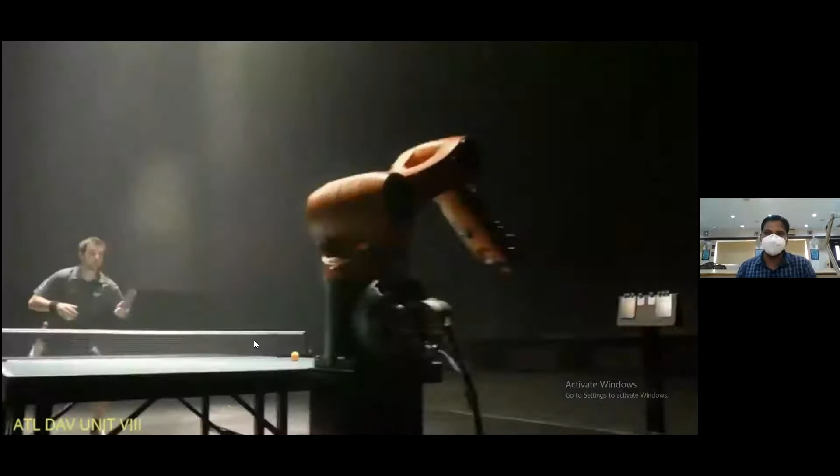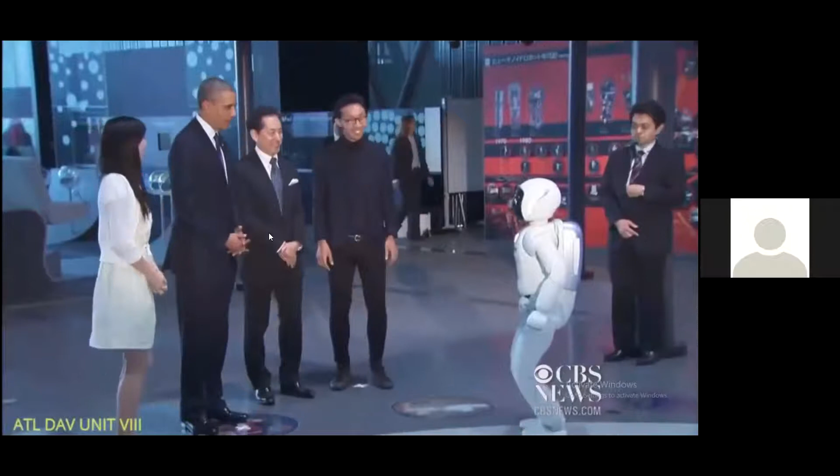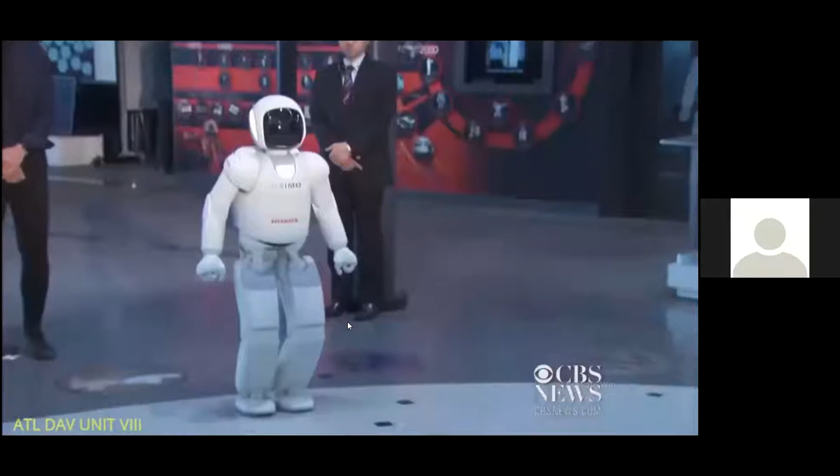Welcome to Miraikan, Mr. President. I'm ASIMO, a humanoid robot. Here I go. I can hear. It's going to be pretty hard, huh? If it hits me in the nose, it'll be terrible. I can keep you watching. Okay, come on, I'm ready. Right here? Here I go. Hey!

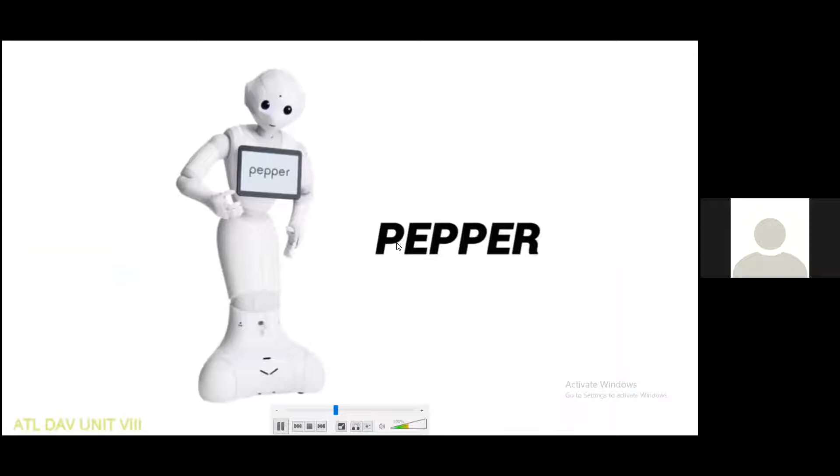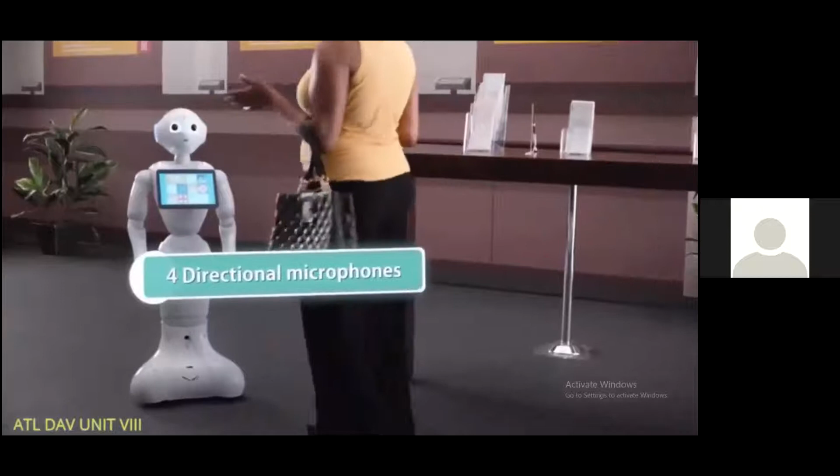This is Pepper, manufactured by SoftBank Robotics. Pepper is the world's first social humanoid robot that is able to recognize faces and basic human emotions. Pepper has been adopted by over 2,000 companies around the world.

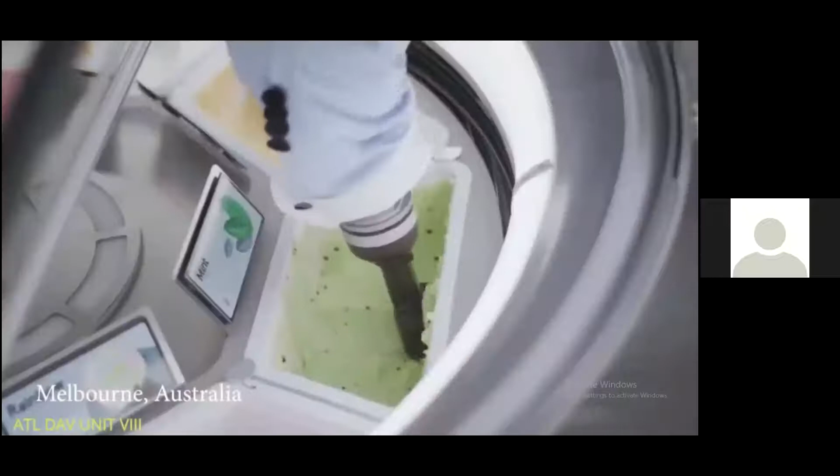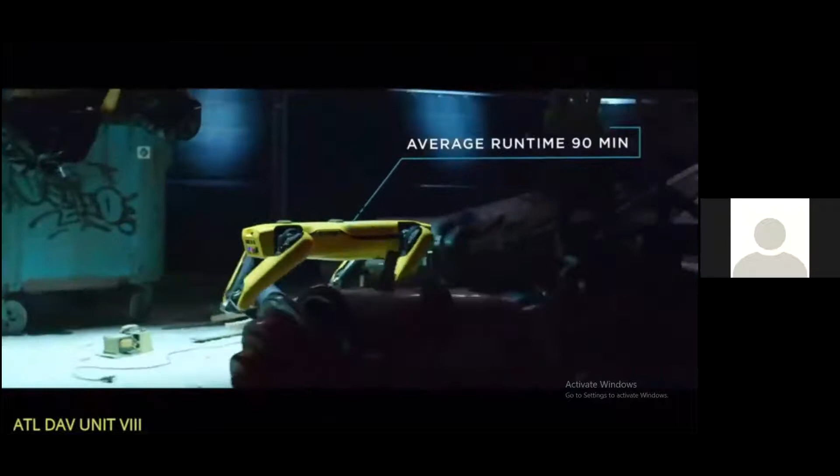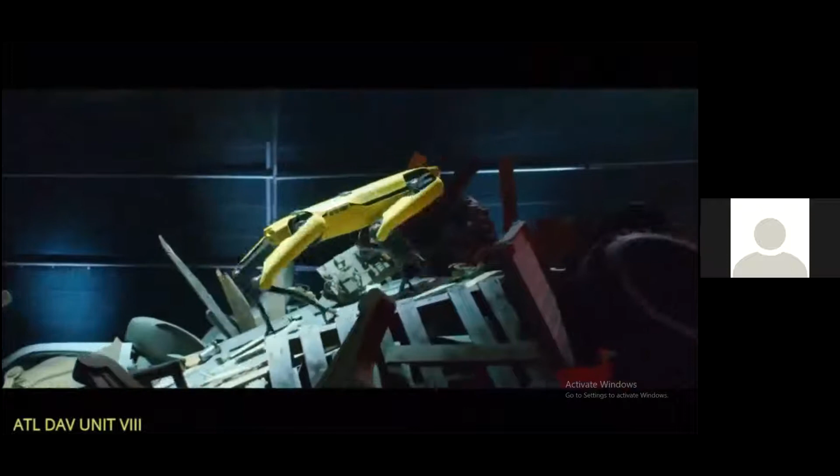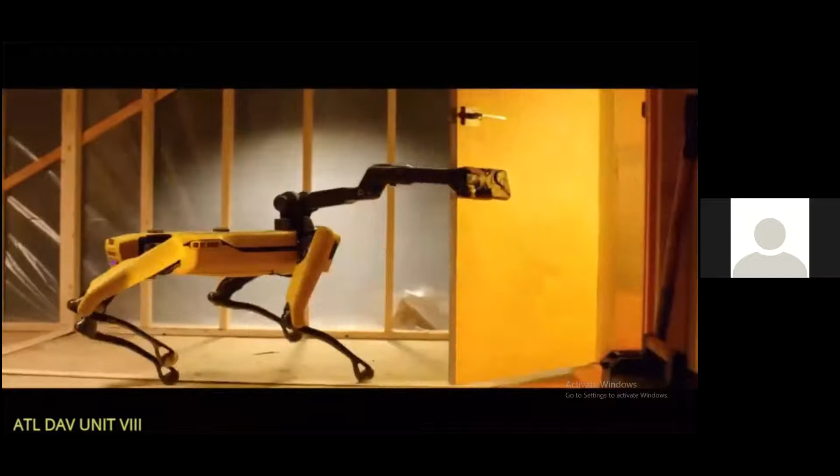Introducing Spot, a robot dog designed for industrial uses, such as carrying goods through a warehouse and inspecting a remote site with an unfavorable environment for human operators. It can run at 5.2 feet per second, has 360-degree cameras, and can operate in temperatures ranging from -4 to 113 degrees Fahrenheit. With its API and flexible payload interface, the robot can be easily customized for desired tasks.

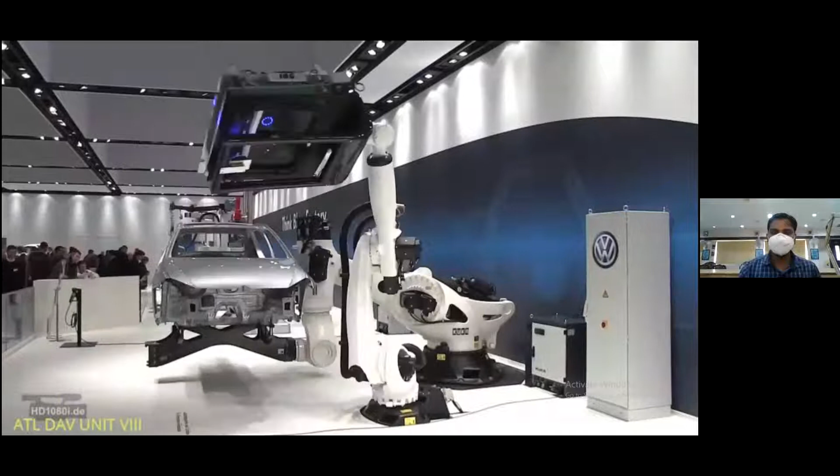Dear students, I hope you all have enjoyed the video. But here a question arises: in this video, what is challenging the human beings? Who is playing with the human beings? And what is making the work easier for the human beings? Yes, they all are robots.

So welcome again to all of you to this robotic workshop. Let's go forward. In this session, what we are going to discuss: first, what is a robot, then the basic architecture of a robot, then the structure of a robot, and different equipment used in the robot we are going to make today. Then we'll have a hands-on activity on making an obstacle avoiding robot.

So, what is a robot? You can share your answer in the chat box. What is a robot? I'm waiting for your responses. Okay, let's discuss.

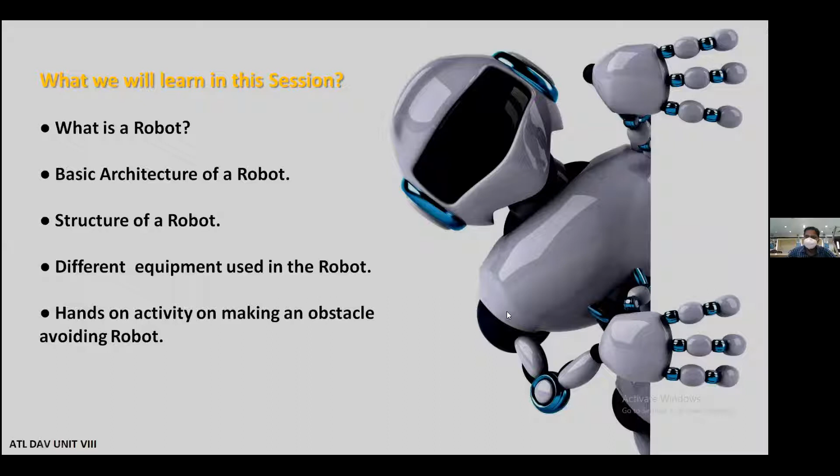A robot is any machine that is automatically operated and replaces human effort. That machine operates automatically, meaning we give a situation to the machine and the machine responds to it the way we have programmed or instructed it. Any machine, if it follows our predefined instructions, we can call that machine a robot.

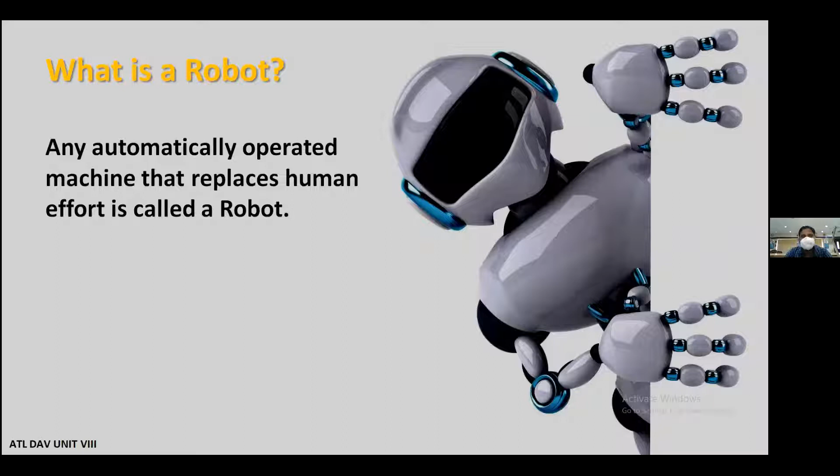Let's discuss all three blocks in detail. First, let's discuss the sensors. What is a sensor? Any answers from your side, dear students? What do you think a sensor is? Okay, recognize a particular motion. Any other answers? Okay, let's discuss. Take output. A device that senses any activity.

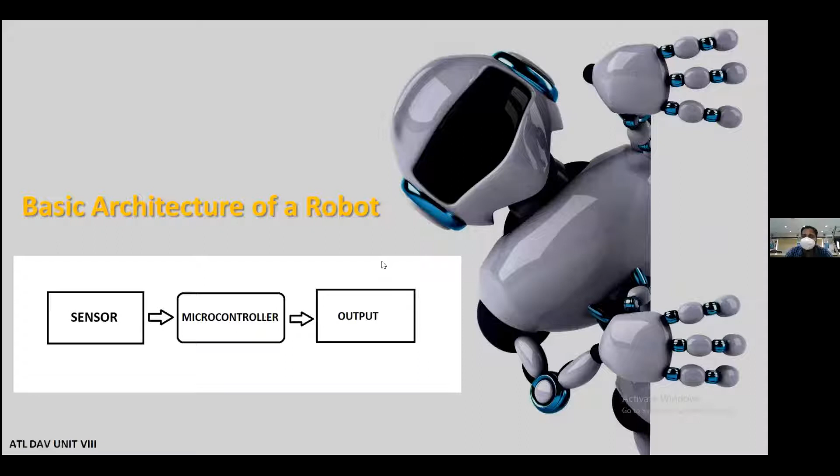No sensor directly transforms the same thing to our brain or the processing unit. It converts to something. Suppose I am touching a hot surface, that heat or temperature converts to some biological signal. That signal is given to our brain.

That is the microcontroller of our human body system, or the brain of the system. Similarly, the sensors which we are going to use in different kinds of automated things, they also do the same thing. They convert physical quantities like heat, vision, or any other physical quantity into an electrical signal, which we can process through a microcontroller to get a desired output, or to function some output devices so that our objective will be fulfilled.

So in one line, if I tell you what is a sensor: a sensor is a device which converts the physical quantities of our surrounding world into an electrical signal.

Suppose I ask you one question. I have made one system that needs to detect a human face. So which device do I need to use? It is very familiar to you all. Yes, someone said OpenCV. OpenCV is the module or the library, so the device is the camera.

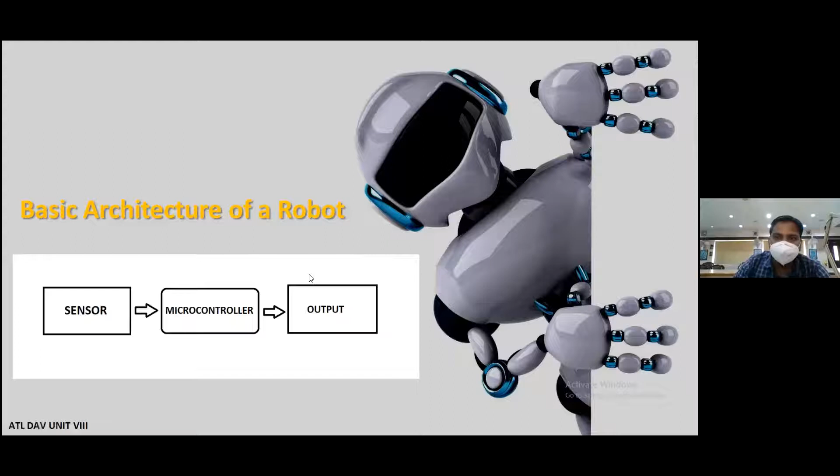Let's go to the next slide. Structure of a robot. So one question arises here: is it necessary that the structure of all robots should be the same?

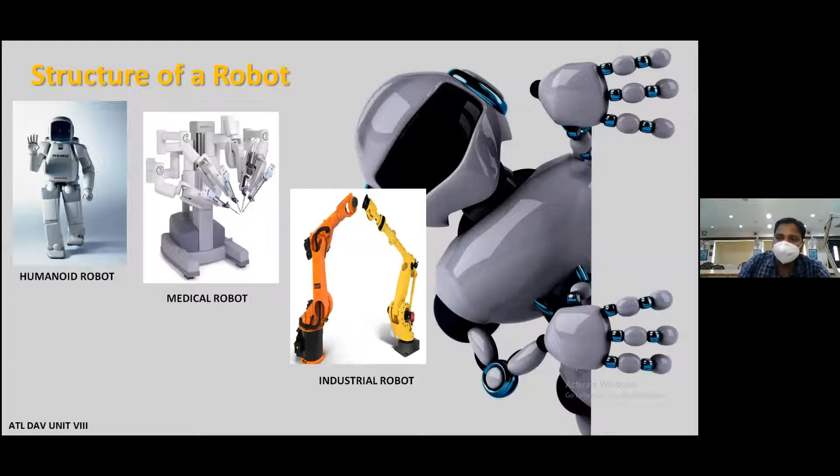Okay. Then today we are going to design an obstacle avoid robot. The function of the robot is whenever an obstacle comes in front of it, it will just move, it will turn itself to avoid that obstacle.

To do that, what we have used here: one plyboard, you can take cardboard as well, or any hardboard plastic sheet of 20 cm into 10 cm, and you can choose your size also.

So to detect the obstacle in front of the robot, we need a sensor. Otherwise that system cannot detect anything in front of it. Like we have the sensor, our eye, we can see so that we can avoid obstacles, but how will the machine do it? It needs a sensor.

So here we are using an ultrasonic sensor. As a microcontroller, we have taken an Arduino Uno. We'll discuss it in detail.

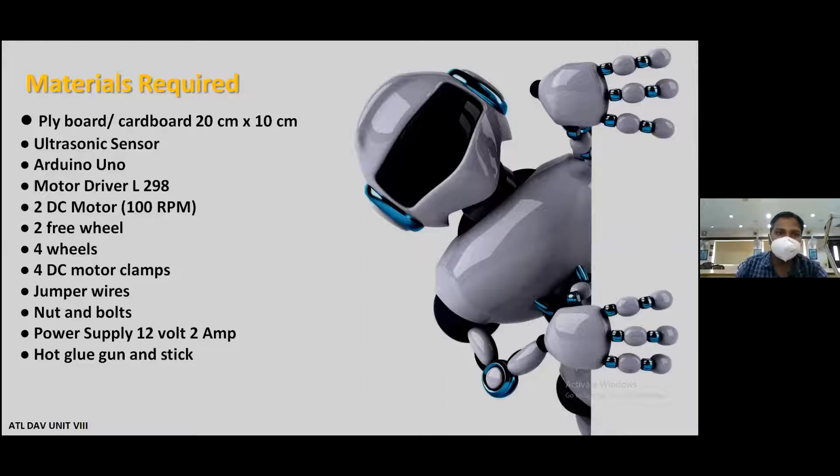Power supply to give power to the robot. We have taken here 12 volt 2 ampere, and hot glue gun and stick for fixing the components or the equipment. Okay, so let's discuss the equipment we are using.

Next, the remaining 2 pins - one is trigger pin, in short written as trig, and another one is echo. So let's discuss how it works. Ultrasonic sensor works on the principle of sound. We will send a high frequency sound from the transmitter, and that sound strikes the object and returns back. Which animal uses this principle to detect obstacles? Can you answer?

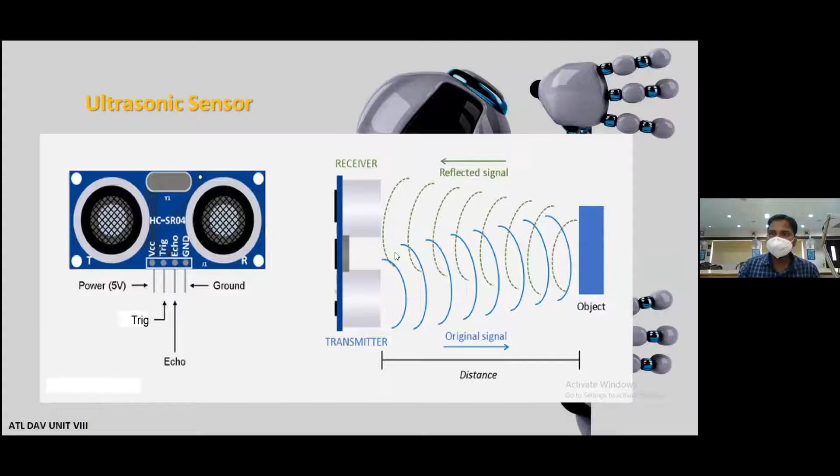Now let's discuss Arduino Uno. Here we are using the Arduino Uno as the microcontroller, or brain, of the system. Let's discuss the pins first.

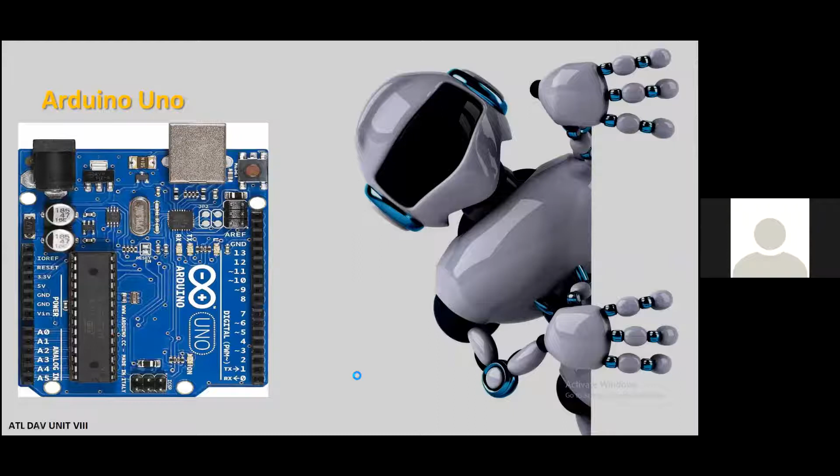Good morning, Tanmay sir. Good morning, ma'am. Good morning, children. Rishabh Mishra, what are you asking and to whom are you asking? Rishabh Mishra, class 11. What are you asking and to whom are you asking? If you don't wish to continue in this class, leave it. What wrong lesson are you writing? If your mind is elsewhere and you're not interested in this class, please don't disturb, and keep writing wherever you're writing to. Rishabh, could you hear me? Yes, ma'am. What, to whom are you writing now? No ma'am, actually in this robotic class meeting, another boy was asking me something, and I was replying. Please, if people are in class 11, you should see how LKG and UKG children are writing and how involved they are. They interact with teachers respectfully during the class they are attending. And you people in senior classes are just diverted and distracted even during classes. No ma'am, this is happening exactly in your online class as well, another person was asking me something and I was replying to him. Listen everyone, concentrate on the specific class you are attending. Yes ma'am, sorry. Sir, please continue.

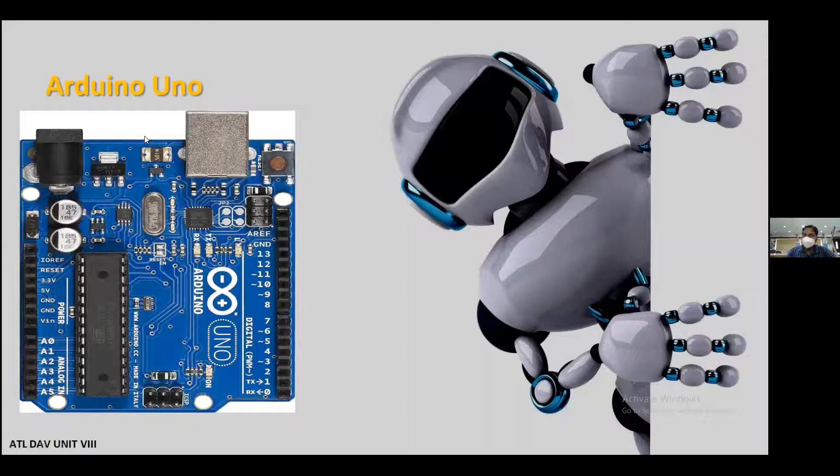Tanmay sir, somebody is writing - sir, please repeat what is digital. Yes ma'am, what is digital? Listen, suppose one more example I will give.

Again I am repeating, if a situation is varying with time, it is analog. If a situation has a constant value, that is digital.

Suppose I ask you, is the light switched on or off? You will tell me off or on, that means it stands as one of these two things. Either it is on or either it is off, not in between. This type of thing we can call digital.

In digital, we always say that computer works on 0 or 1. Going more technical, suppose one sensor gives an output ranging from 0 volt to 5 volt. Another sensor also gives output from 0 to 5 volt. But if the situation is correct, it will give you 5 volt, or if the situation is not satisfying, it will give you 0 volt. But in the same situation, another analog sensor may give you a value of 0.2, 1.2, 3.5, like this. So digital sensors always give us fixed values, two fixed values.

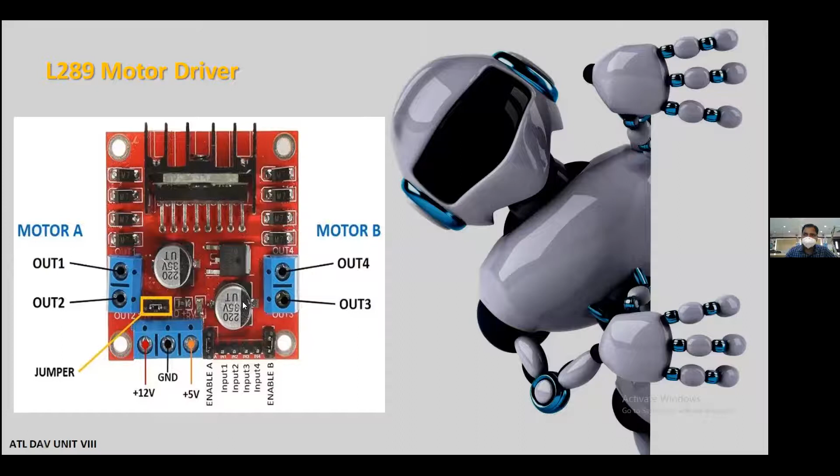So here I have taken four variables: RMF, right motor front, right motor back, left motor forward, left motor backward. For that I have taken pins 3, 4, 5, 6, the digital pins in the Arduino, which will be connected with the motor driver.

Motor driver, I have shown you 4 pins are there. These 4 pins of the microcontroller will be connected to the motor driver, through which we give the command to the motor driver, so that we can control the direction of the robot. Next thing is to connect the sensor.

For the sensor, I have shown you 2 pins are there, one trigger pin, one echo pin. The trigger pin is connected to pin number 9 of the Arduino, and the echo pin is connected to pin number 8 of the Arduino.

Okay, in this code setup part, mainly we declare the pin and its function. The digital pins or the analog pins, they can act in both ways. They can be used as output pins, they can be used as input pins.

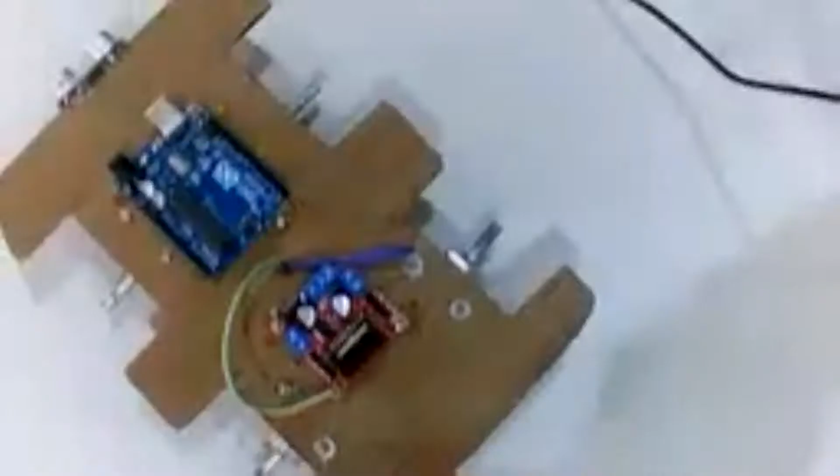By using this USB cable, I can upload the code to the microcontroller. Now see, the microcontroller gets the power, and now I am uploading the code. Yes, now it is uploaded. Now whatever code I have written, that's fed into the microcontroller.

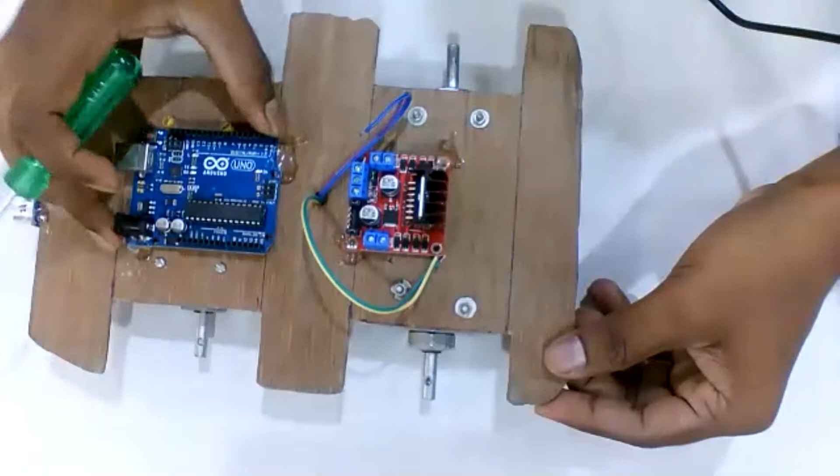Now let's do the connections. First, we have taken this wooden board, we have cut it, and for time management, I have fixed this equipment.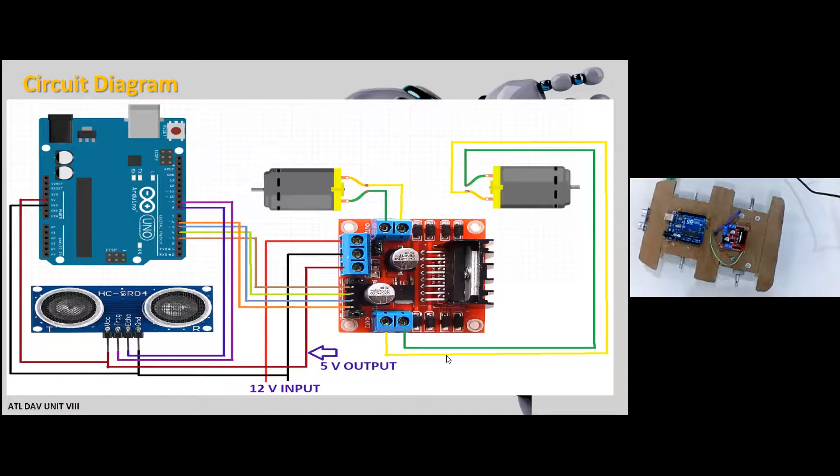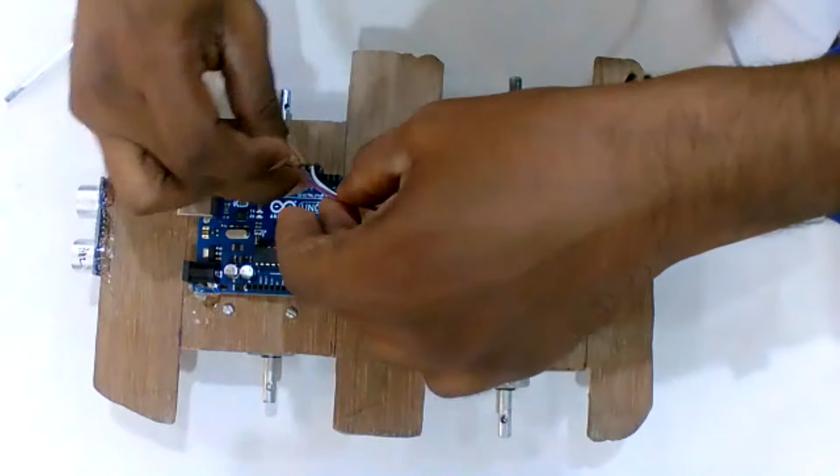So as in the program or coding, we have chosen pin numbers 3, 4, 5, 6 as the pins to be connected with the motor driver, which will control the motor. So I am going to connect these pins with jumper wires. Connecting pin number 3, then 4, then 5, then 6. These 4 pins I have connected in the microcontroller.

Similarly, I will connect these pins to the motor driver, starting from pin number 3. Pin number 3 will go to input 1 of the motor driver, so here I am connecting. Then pin number 4 to the second, pin number 5 to the third, pin number 6 to the fourth one.

Okay, now the motor driver is connected. Students, here I have connected 2 motors. Here 2 free wheels, no motor is there, it can move free. Here I can attach the wheels. Let's attach the wheels.

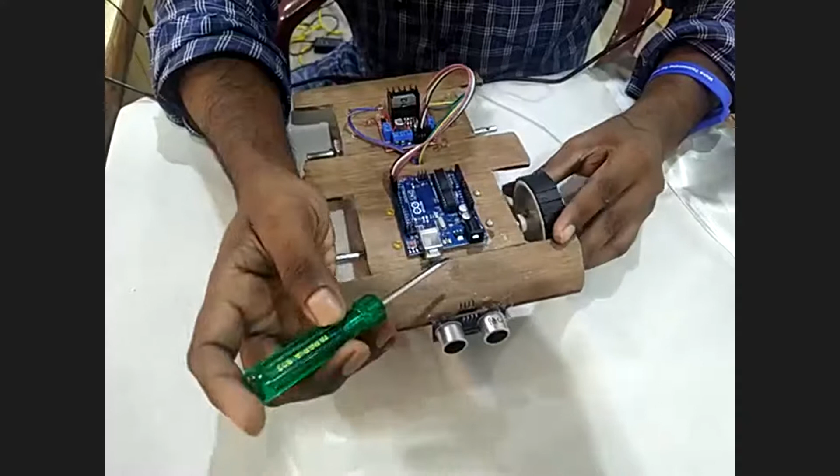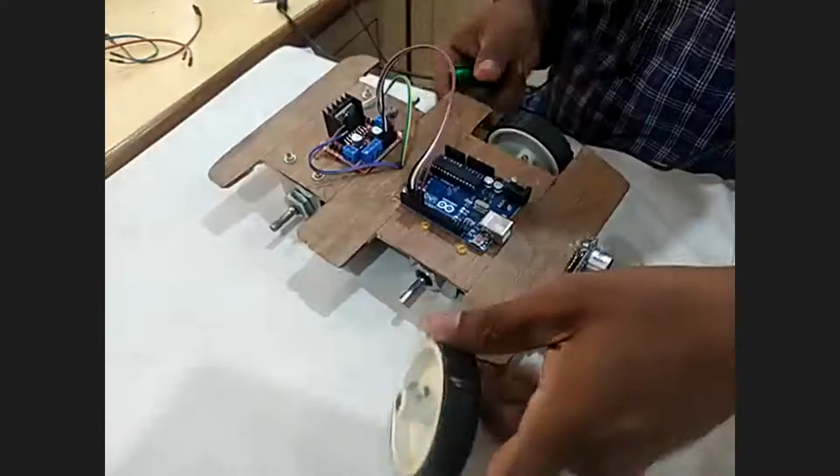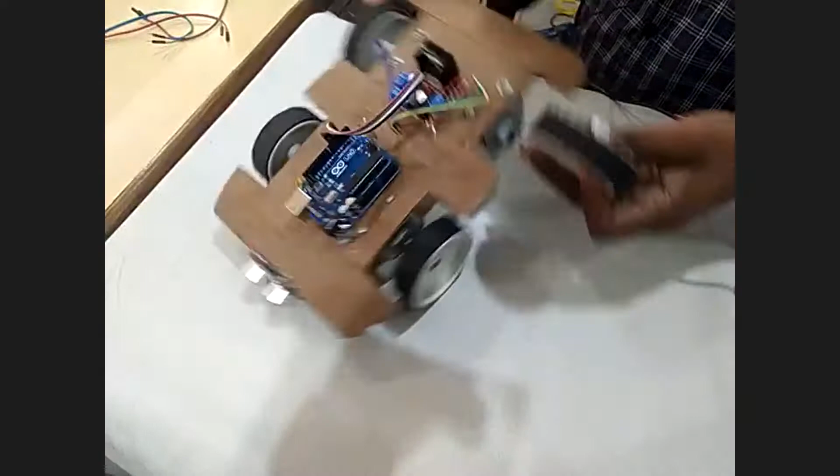With the help of a screwdriver, fix all the four wheels. Two wheels are fixed. Tighten it so that it will not come out while it is rotating. Okay, almost all motors are fixed. Final last wheel I am attaching.

Now see, all the four wheels have been attached, and we have connected the microcontroller with the motor driver. Here we have taken two wires from each motor, and here you can see we have taken output. So these two wires for two motors: this wire for the right motor, this one for the left motor. So I am going to connect it to the output of the motor driver.

One thing you see here: if you are changing these wires, then also your motor can work in the wrong direction. If after connecting this, if this thing happens, you can change the wires. Suppose I have connected it this way but it is working reversely, you can change it, so that again it will work perfectly.

Okay, now the motor is almost fixed with the motor driver. Let's connect the ultrasonic sensor with the microcontroller.

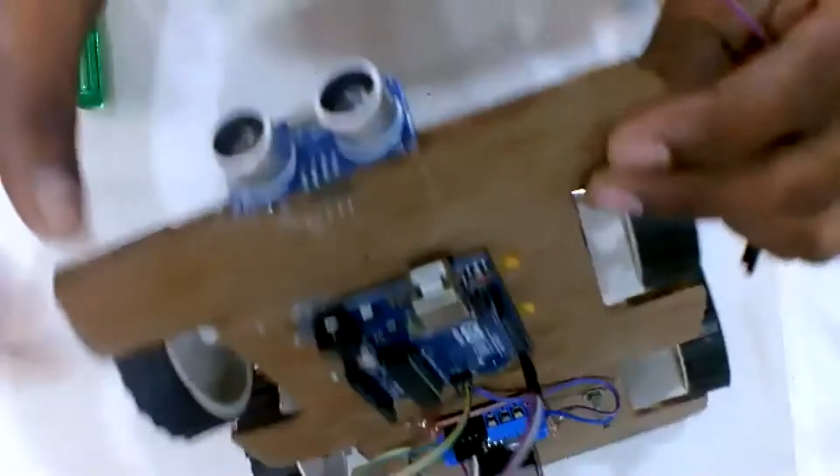So we have taken pin number 9 as the trigger pin. You can see, I'll focus it, here one trigger pin is there and one echo pin is there. So first I need to connect that. Trigger pin I will connect to pin number 9 - this is the trigger pin. Then is the echo pin. Both pins I have connected in the sensor.

Now I will connect it in the microcontroller: trigger pin number 9 and echo pin number 8, as we have written in our program. You can choose any other pin as per your choice, and accordingly you need to connect.

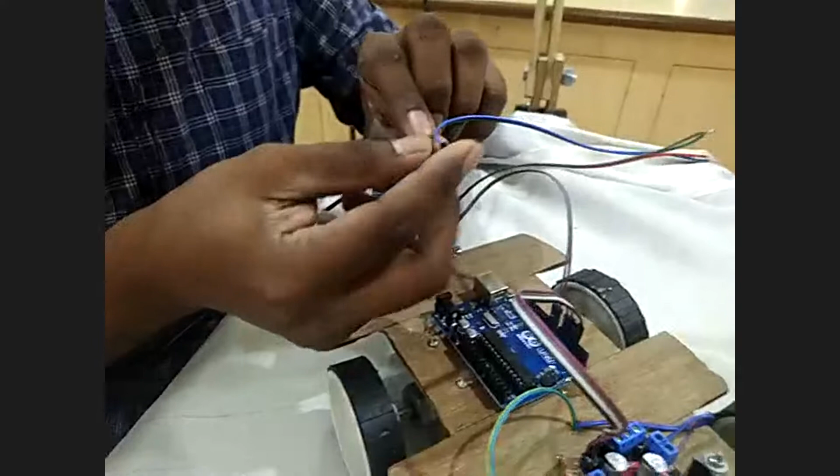So here I have joined or soldered two jumper wires for powering purposes, to power the Arduino and the sensor as well. Then I will connect the VCC. This red one is the VCC or 5 volt, I'll connect it here. And this gray one is the ground pin I have connected. So here, this blue wire I am using as positive, and this green wire as negative, where I will give power to the Arduino. The blue one I will give in positive 5 volt.

This is the 5 volt pin, and this is the ground pin. So now almost our robot is complete. Only we need to connect the power pin.

As I told you before, in this motor driver, one 5-volt regulator is there, which is giving us 5-volt as output in this pin, so that we can take this 5-volt to power the Arduino and the sensor as well.

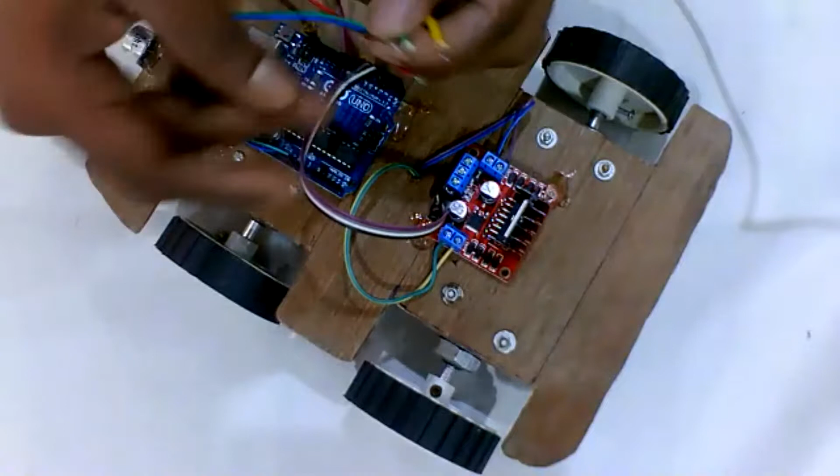So here I am using a power supply of 12-volt, taken externally. Now I will fix it.

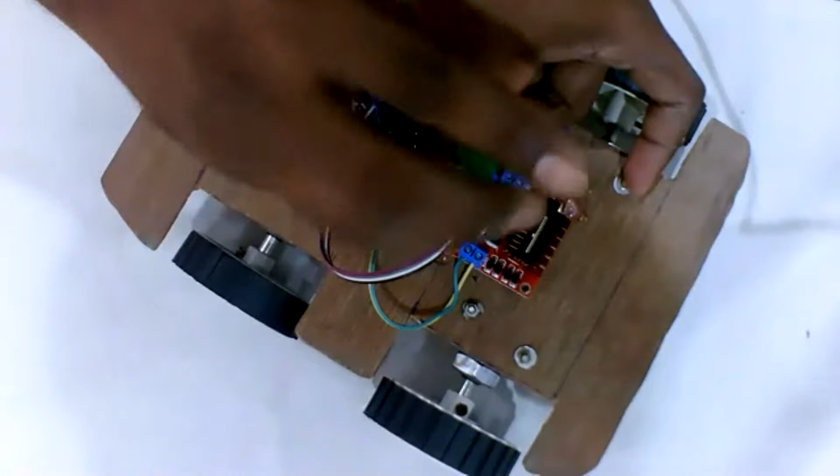This is the ground connection I am connecting now. Then I will tighten the screw so that it will not come out. This is the input 12-volt positive, which we are giving to the motor.

Now the input is also connected. Now the remaining is the output 5-volt. That output 5-volt I will keep on this pin so that we can take output and power the Arduino and the sensor as well.

See, this wire may get stuck somewhere, so I can glue it. Fix it through glue, so it will not disturb us, and the connection will not move.

Let it dry. Okay, and this one is dried. Now we are going to test our robot. I am taking it to the ground to test it.

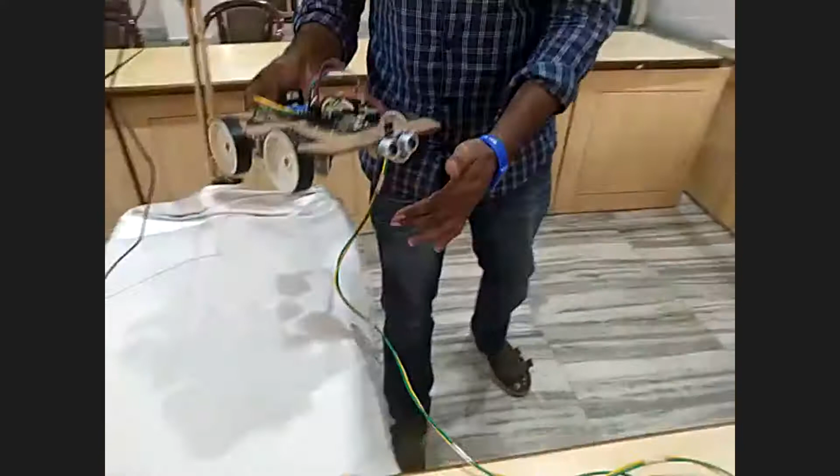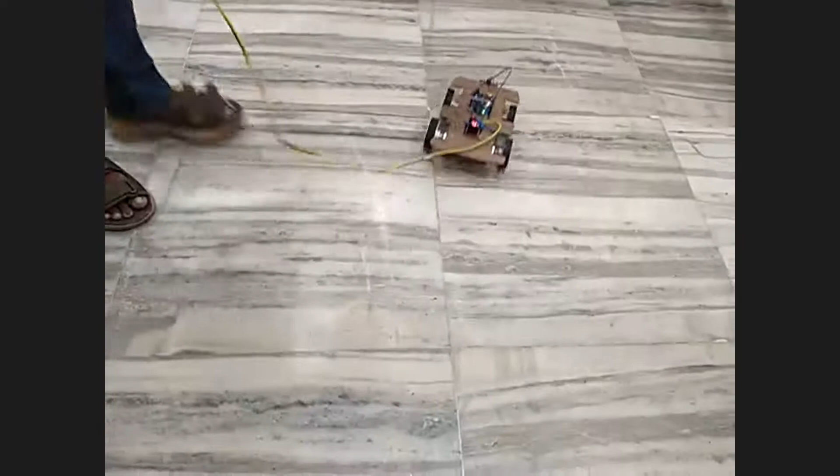We have placed our robot here. I will switch on the power. See, it is moving. Now it has detected an obstacle. It turns and keeps moving.

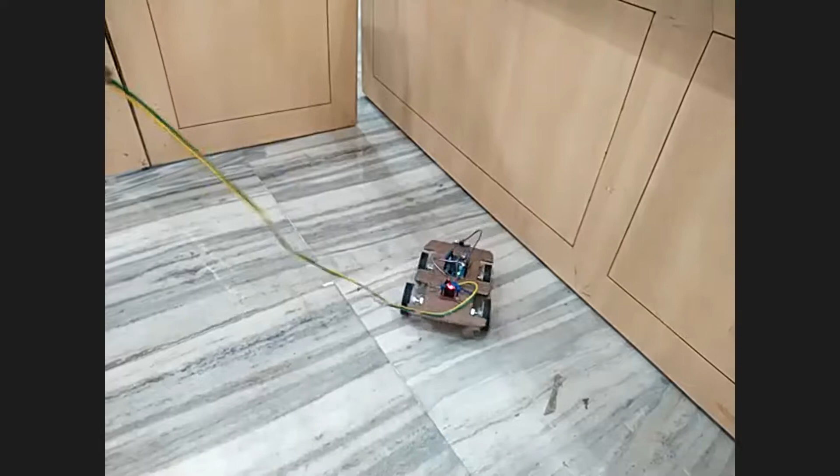Suppose I put my hand here. See, it is going straight. Detected obstacle and turned. Again detecting obstacle, turning, and then it is going straight. Suppose it detects an obstacle and takes a turn.

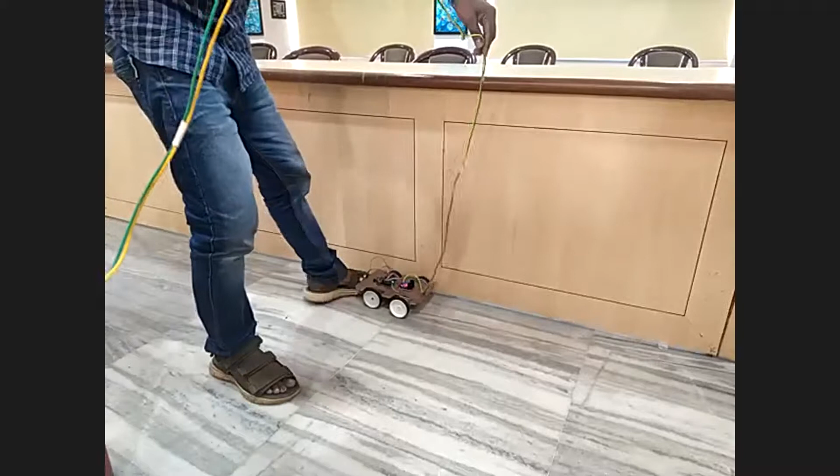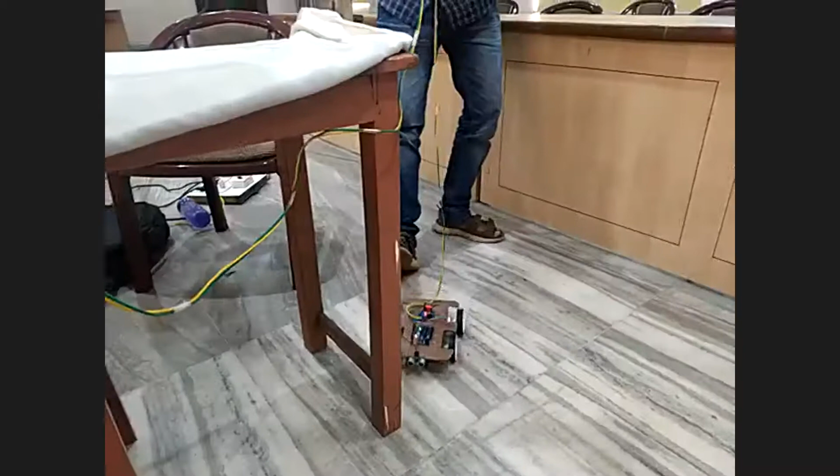It is going, suppose I come in front of it, it is detected, then it is turning. Like this, when something comes in front of it, it keeps turning.

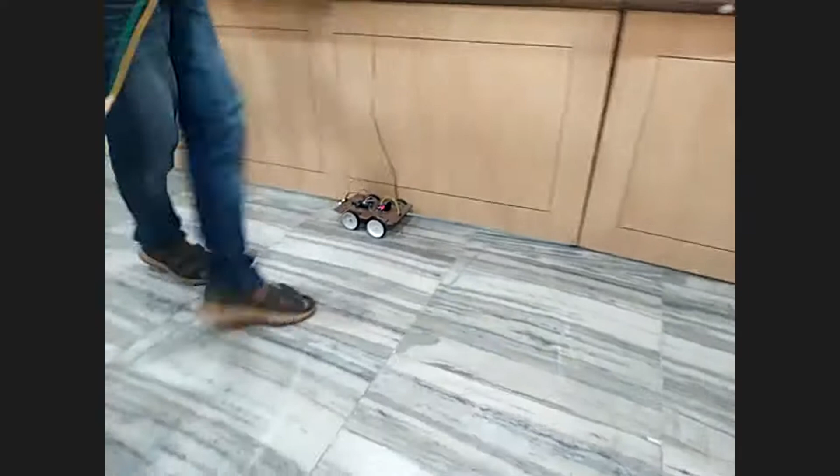So, detected obstacle, now it is automatically moving. Detected obstacle, again it is moving. It is creating its own way. So I put something in front of it, and it is not striking it, it is making its own way.

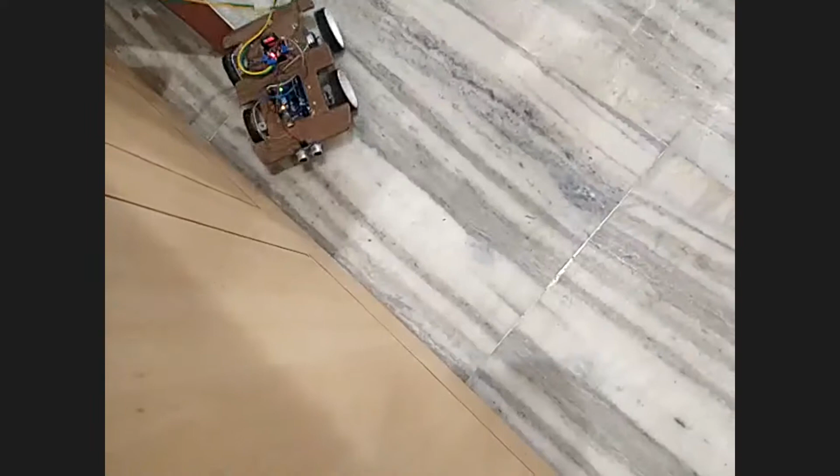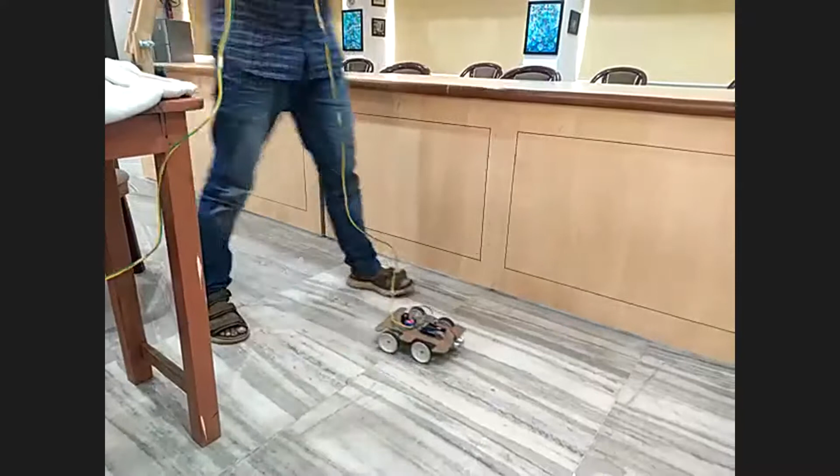Suppose I place my hand here - no obstacle, it is going straight. I'll keep my hand here, so it will start turning. Obstacle. My hand here - it is not striking my hand, only rotating and avoiding it.

So dear students, you have seen how a robot detects an obstacle and avoids it. You can also make many projects by using this concept. If you have any doubt, please ask.